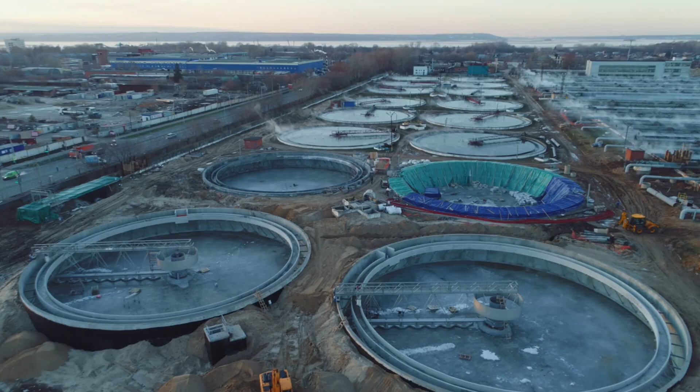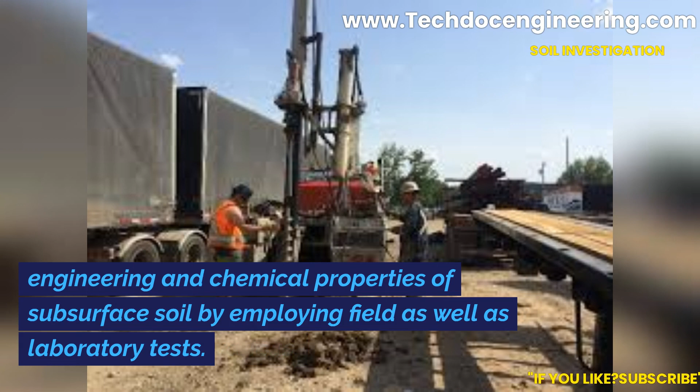This specification is prepared for the purpose of carrying out confirmatory/verification soil investigation work within the proposed plot at respective locations. Scope of the geotechnical investigation shall include ascertaining the existing conditions, subsoil strata, level of groundwater table, and determination of various engineering and chemical properties of subsurface soil by employing field as well as laboratory tests.

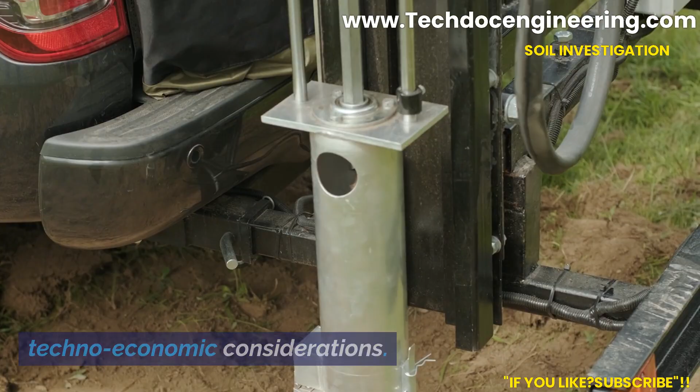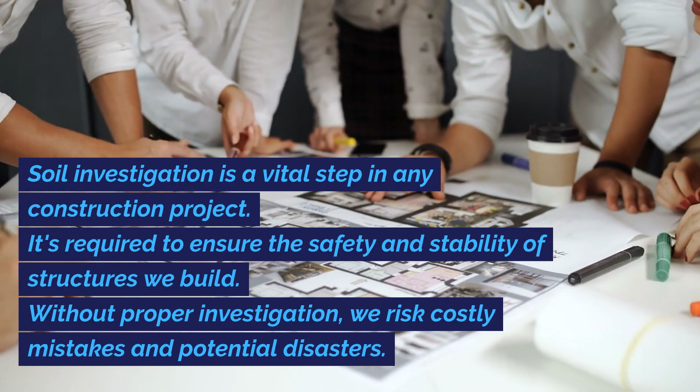It is required to propose a suitable foundation system for different types of structures based on techno-economic considerations. The need for soil investigation. Soil investigation is a vital step in any construction project. It's required to ensure the safety and stability of structures we build. Without proper investigation, we risk costly mistakes and potential disasters.

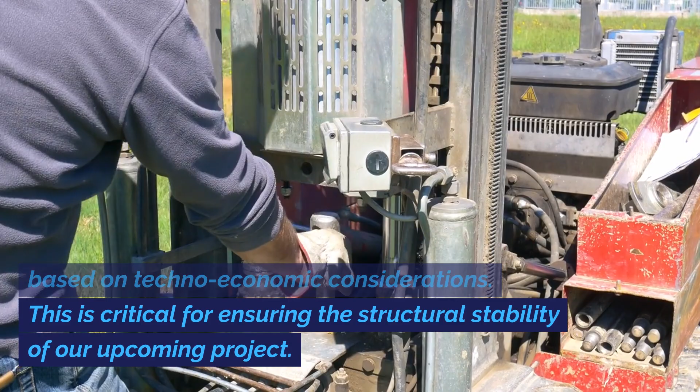Scope and purpose of geotechnical investigation. Geotechnical investigation is essential for our project located at your project location. The aim is to understand existing conditions, subsoil strata, groundwater levels, and soil properties. It helps us propose suitable foundation systems based on techno-economic considerations. This is critical for ensuring the structural stability of our upcoming project.

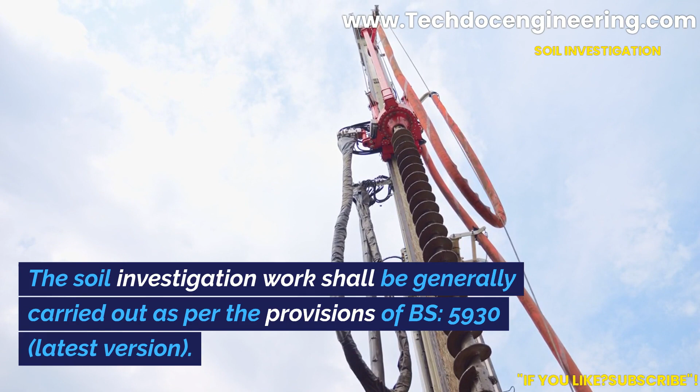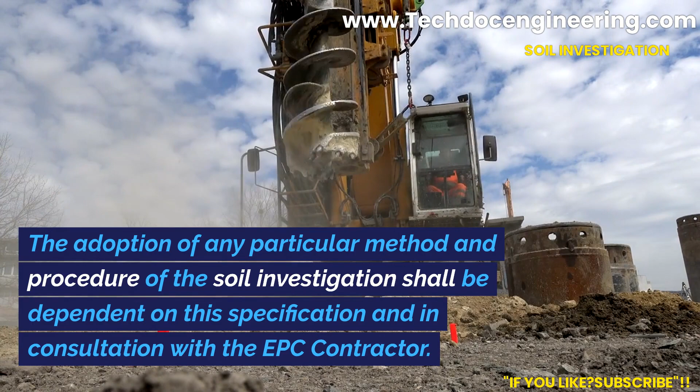The subsurface investigation shall be carried out generally in accordance with this specification. The soil investigation work shall be generally carried out as per the provisions of BS 5930, latest version. The adoption of any particular method and procedure of the soil investigation shall be dependent on this specification and in consultation with the EPC contractor. The extent of work shall be in accordance with Bill of Quantities.

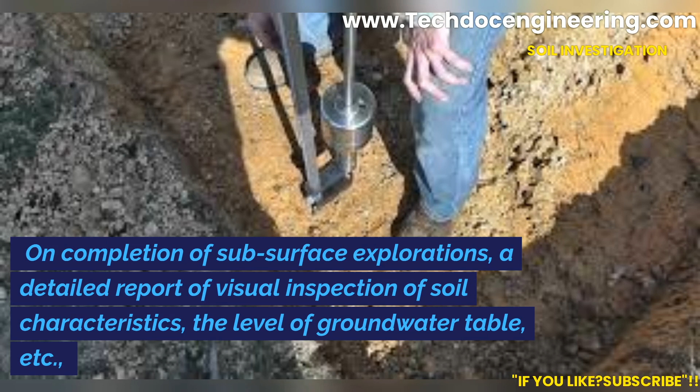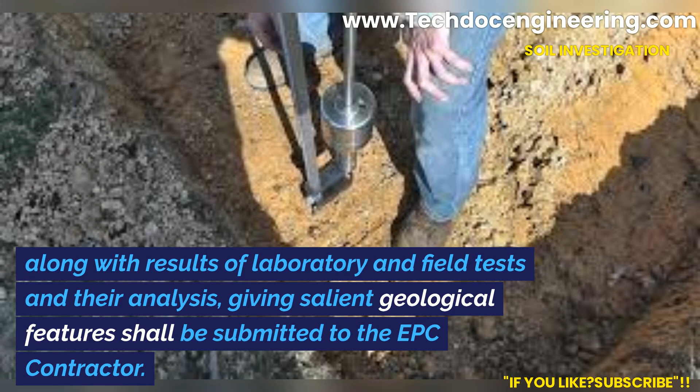The depth of exploration shall be governed by Section 4.0 of this specification and shall be to the satisfaction of the EPC contractor. On completion of subsurface explorations, a detailed report of visual inspection of soil characteristics, the level of groundwater table, etc., along with results of laboratory and field tests and their analysis, giving salient geological features, shall be submitted to the EPC contractor. These details shall be clearly indicated with respect to each reference borehole.

The contractor shall provide their foundation recommendations for open, pile foundation in the format as given at the end of this document. To provide information regarding the most suitable method for soil improvement wherever required.

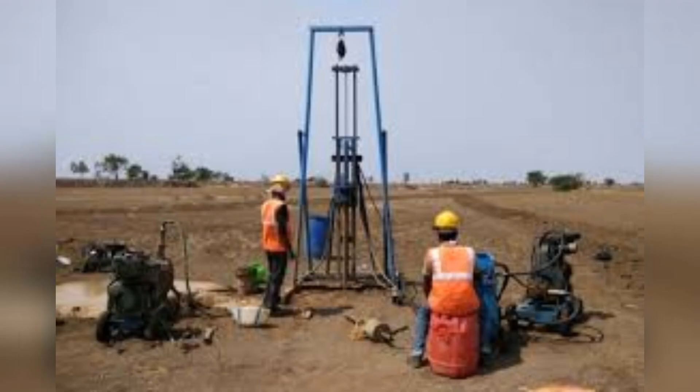Subsurface investigation. The subsurface soil investigation is to be carried out to arrive at the topographical features and gather information about strata in the subsoil and groundwater conditions. The subsurface investigation work shall be carried out generally in accordance with BS 5930, latest version.

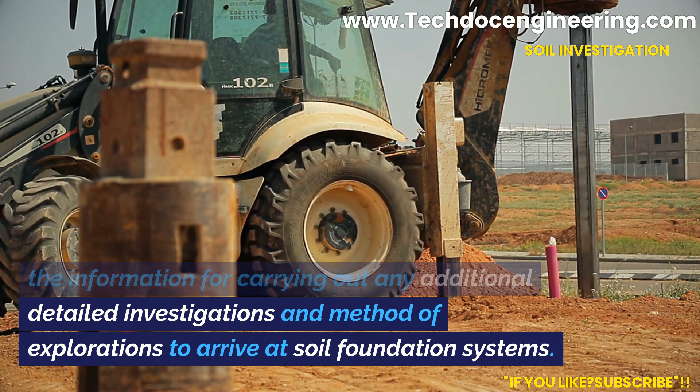Also, this investigation should help in arriving at different characteristics and nature of soil, the pre-consolidation it has undergone, and the information for carrying out any additional detailed investigations and method of explorations to arrive at soil foundation systems. Recommended locations of various field tests are indicated in your document.

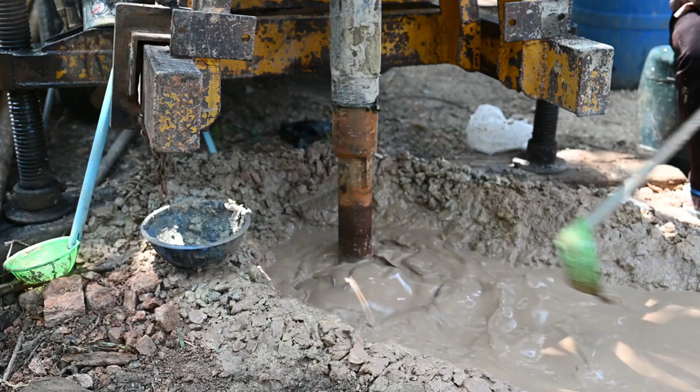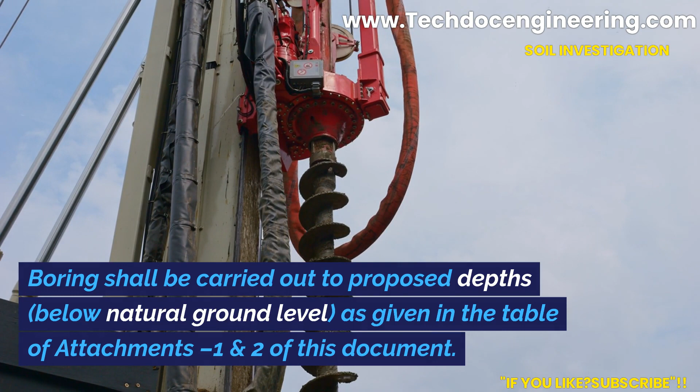Boring. The boring shall be carried out in all types of deposits, including boulders or gravelly strata and excluding hard rock, by the applicable method with the specifications given below. Boring shall be carried out to proposed depths, below natural ground level, as given in the table of attachments 1 and 2 of this document. In order to confirm the existence of hard rock, a minimum depth of 1,000 mm shall be drilled in the hard rock stratum, if met with.

When the rate of advancement of boring by chiseling is slow, i.e., less than 20 cm in 4 hours, the contractor shall advance core drilling with NX size double tube, triple tube core barrel of the approved design fitted with a diamond bit.

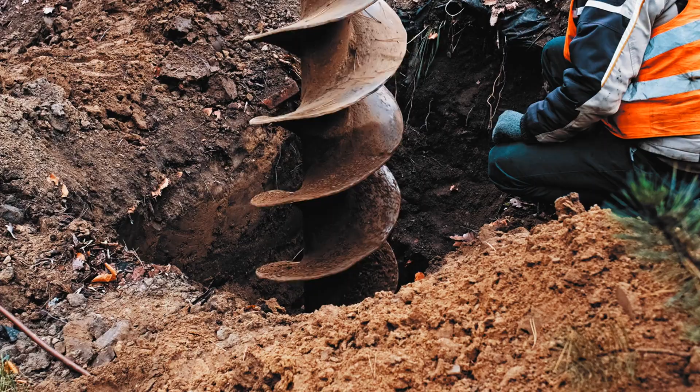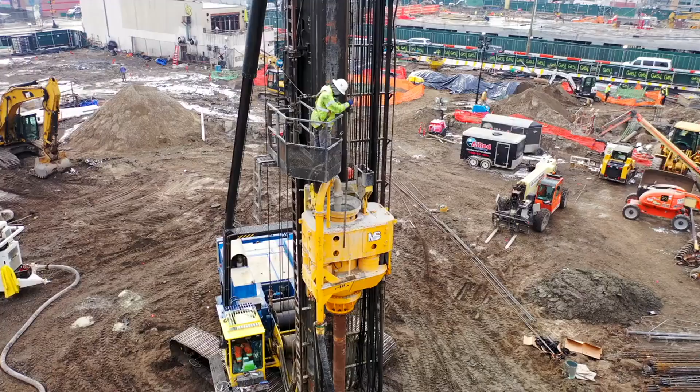Auger boring. Augers shall be of helical or post hole type and may be manually or power operated. The diameter of the hole shall be 150 mm. Uncased holes shall be permitted only up to a depth where the sides of the hole can stand unsupported. In case side fall is noticed, steps shall be taken immediately to stabilize the hole by using casing pipes.

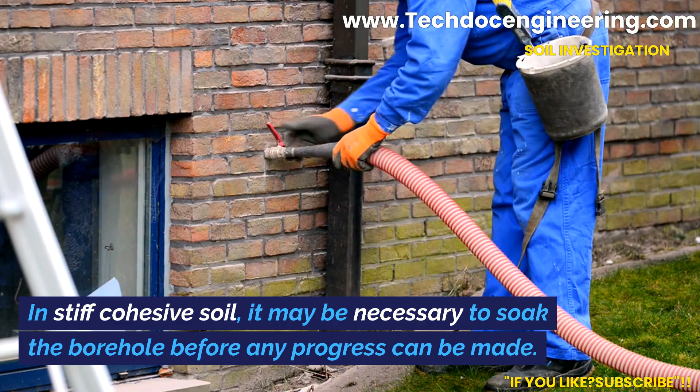No water shall be added while boring through soft cohesive soils and cohesionless soils above the water table. While boring through cohesionless soils below the groundwater table, water in the casing shall always be maintained at or above the groundwater table. In stiff cohesive soil, it may be necessary to soak the borehole before any progress can be made. While boring, care shall be taken to minimize disturbance to the deposits below the bottom of the borehole.

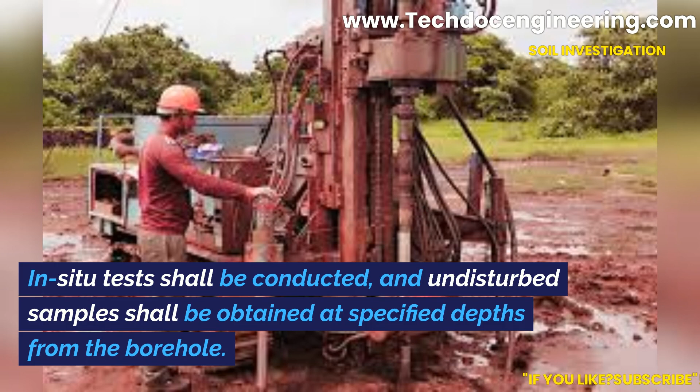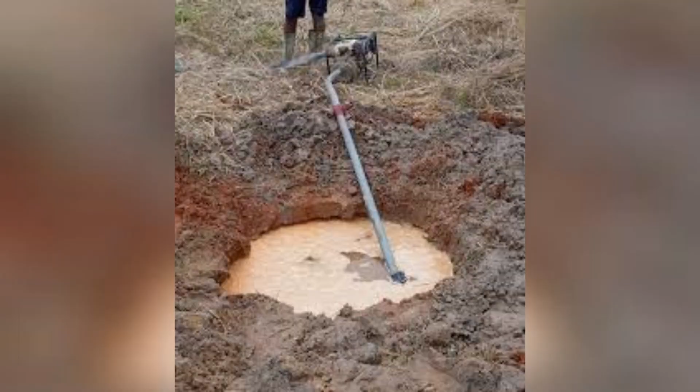In situ tests shall be conducted, and undisturbed samples shall be obtained at specified depths from the borehole. The borehole shall be kept clean and free from foreign matters while conducting these operations. Water table in the borehole shall be carefully recorded and reported. One of the following methods shall be adopted for measuring the water table. Method A is suitable for permeable soil, while methods B and C are suitable for both permeable and impermeable soils.

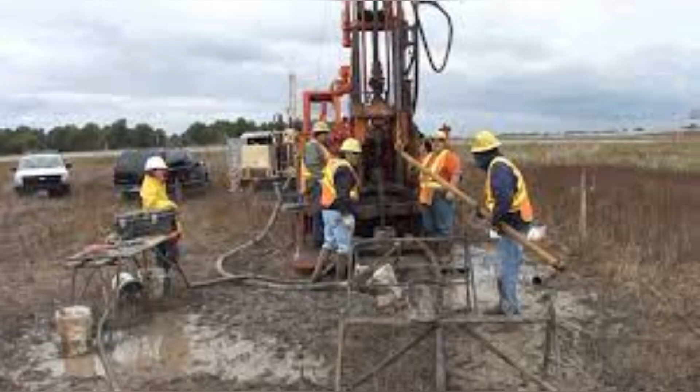A. The water table in the borehole shall be allowed to stabilize after depressing the water level adequately by bailing. Stability of the borehole sides and bottom shall be ensured at all times. B. The borehole shall be filled with water and then bailed out to various depths. Observations shall be made at each depth to see if the water level is rising or falling. The depth at which neither a fall nor a rise is observed shall be considered as the water table depth. This shall be established by 3 successive readings of water levels taken at intervals of 2 hours. The established reading shall be verified after 24 hours.

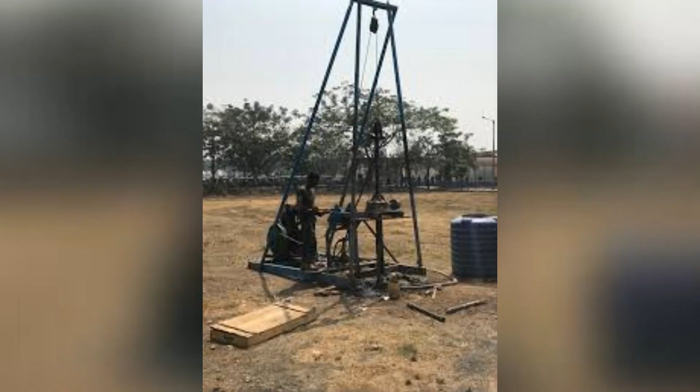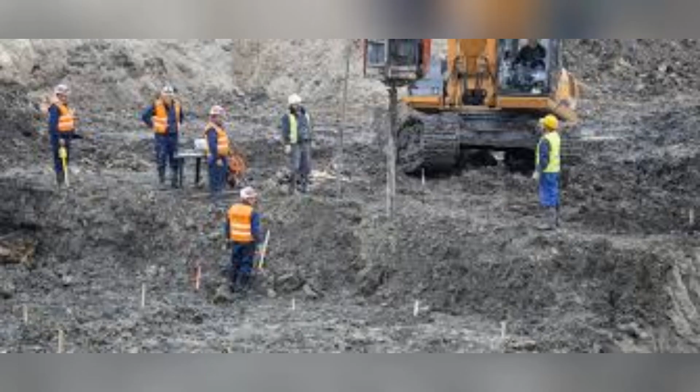Hvorslev method, Ref. Foundation Design by W.C. Teng. The water level shall be depressed by bailing, to say D below ground level, and shall then be allowed to rise. Water rise at suitable equal intervals of time shall be recorded. If H1 and H2 are 2 successive rises of water level in the borehole for the same time interval T, then H0, the distance of the depressed water level from the actual water table, shall be obtained as under.

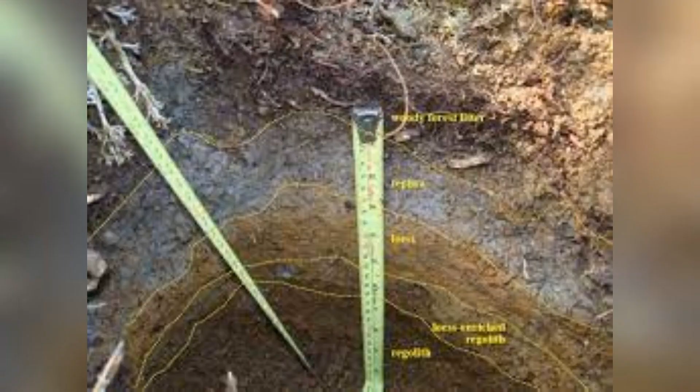H0 equals H1 squared over H1 minus H2. The water table depth HD from ground level shall be determined as under. HD equals D minus H0. 3 sets of observations shall be made, and the average value of HD determined immediately on completion of the borehole.

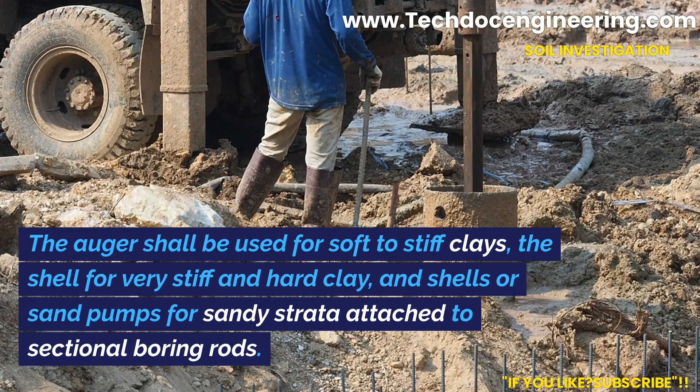Shell and auger boring. The requirements mentioned above in Clause 4.1.1 shall also apply to shell and auger borings. The auger shall be used for soft to stiff clays, the shell for very stiff and hard clay, and shells or sand pumps for sandy strata attached to sectional boring rods. The use of a chisel bit shall be permitted only in boulders and thin strata of rock.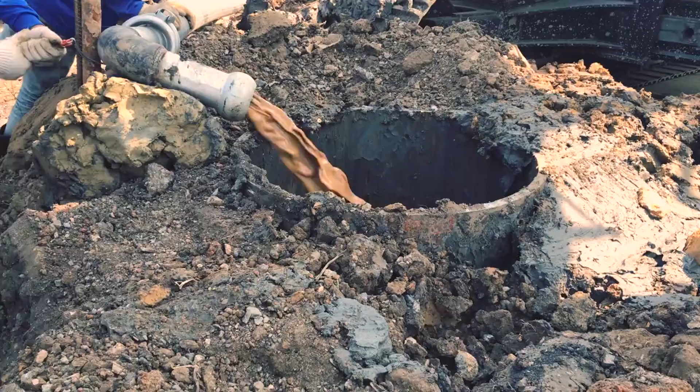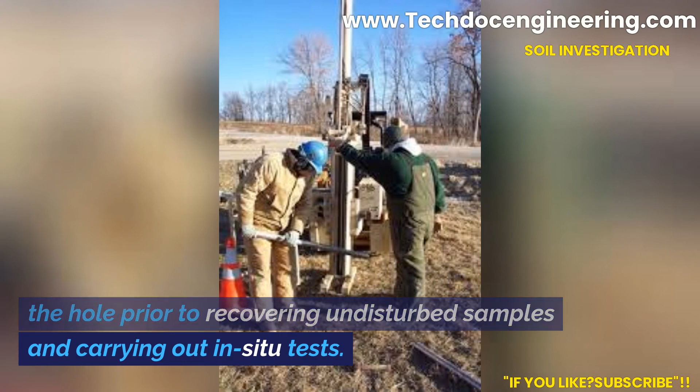Mud rotary drilling. Mud rotary drilling with bentonite slurry shall be carried out as per the standard method. Care shall be exercised in thoroughly cleaning the hole prior to recovering undisturbed samples and carrying out in situ tests. Percussion boring. Percussion boring shall be carried out as per the methods suggested in BS 5930. This method of boring shall be adopted for drilling boreholes in boulderous and gravelly strata.

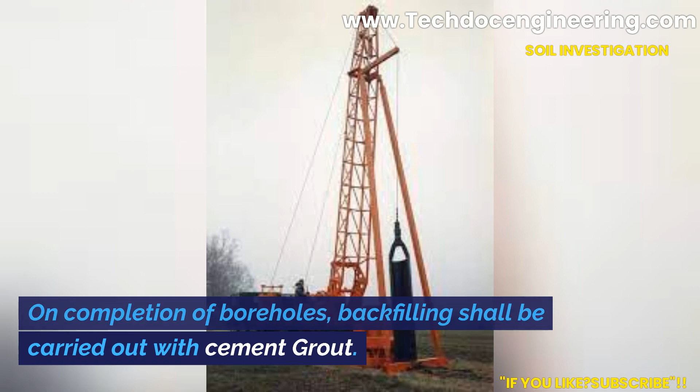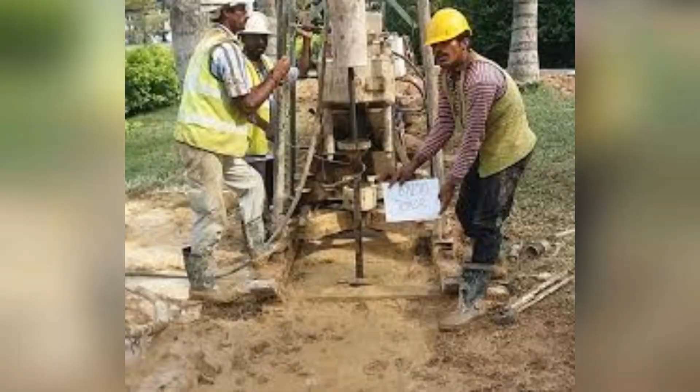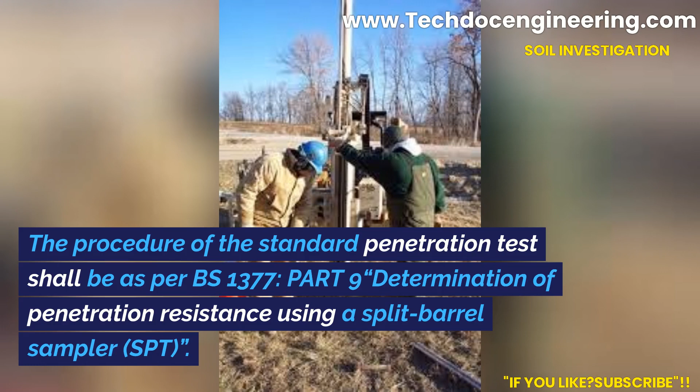Backfilling of boreholes. On completion of boreholes, backfilling shall be carried out with cement grout. In situ tests. The in situ tests shall be carried out generally in accordance with this specification and as per requirements given in BS 5930. Standard penetration test. The procedure of the standard penetration test shall be as per BS 1377, Part 9, determination of penetration resistance using a split barrel sampler, SPT.

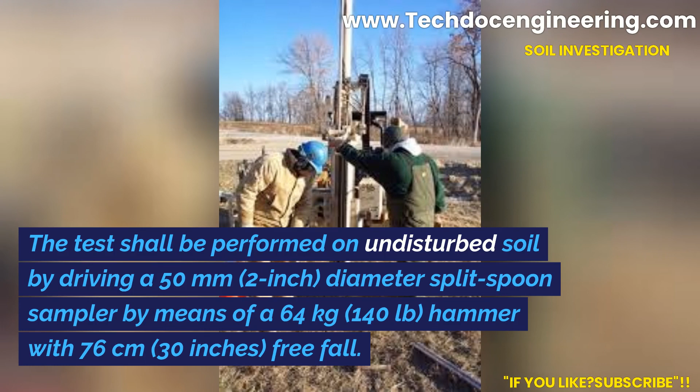These tests shall be conducted in all types of deposits and layers at intervals not exceeding 1.0 meters to a depth of 10 meters, and then at maximum intervals of 1.5 meters within a continuous stratum, or at every change of stratum, whichever is less. The test shall be performed on undisturbed soil by driving a 50 mm, 2-inch, diameter split spoon sampler by means of a 64 kilograms, 140 pounds, hammer with 76 centimeters, 30 inches, free fall.

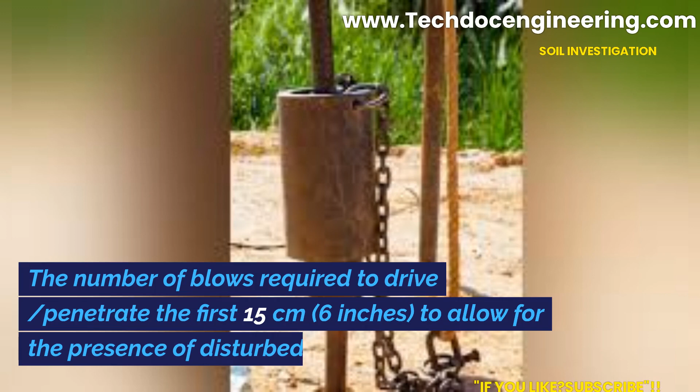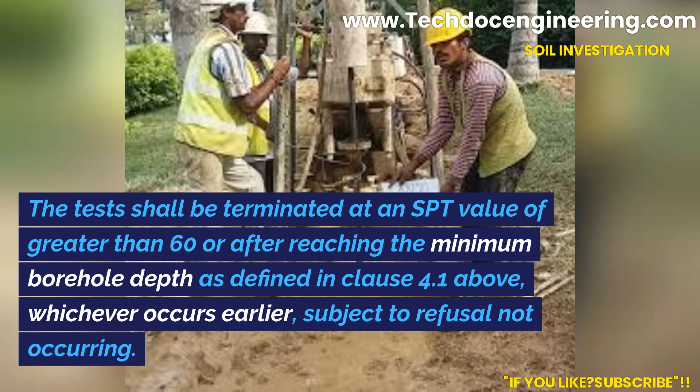The number of blows required to drive/penetrate the first 15 centimeters, 6 inches, to allow for the presence of disturbed material. The number of blows to drive the sampler a further 30 centimeters, 12 inches, of penetration is then recorded as N values. The samples obtained in the split spoon sampler shall be labeled and preserved for identification tests in the laboratory. The test shall be terminated at an SPT value of greater than 60 or after reaching the minimum borehole depth, as defined in Clause 4.1 above, whichever occurs earlier, subject to refusal not occurring. For hard strata, when SPT is greater than 40, SPT shall be carried out at 1.5 meters interval.

4.2.2 Cone penetration test with piezo cone. This test shall be carried out by pushing an electrical cone assembly with pushing equipment having adequate capacity to reach the desired depth.

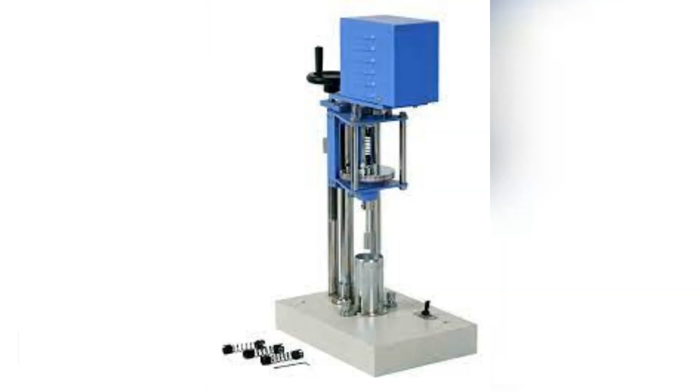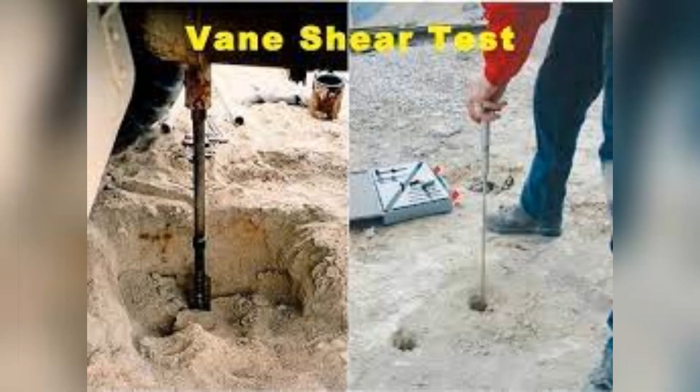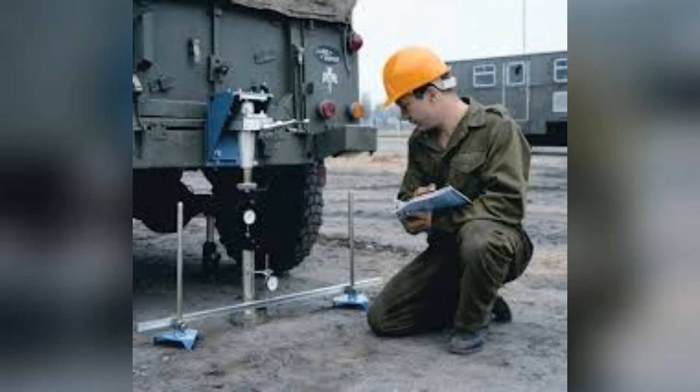4.2.3 Vane shear test. In situ vane shear test shall be carried out as per the relevant BS standard to determine the shear strength of cohesive soils, especially soft and sensitive clays, which are very susceptible to sampling disturbance. This test shall be conducted by advancing a 4-winged vane of suitable size, 75 mm to 100 mm diameter as per soil condition, into the soil up to the desired depth and measuring the torque required to rotate the vane. On completion of the test, the results shall be reported in a standard format.

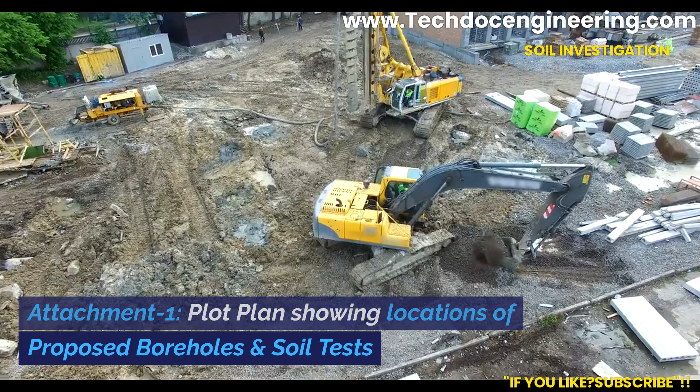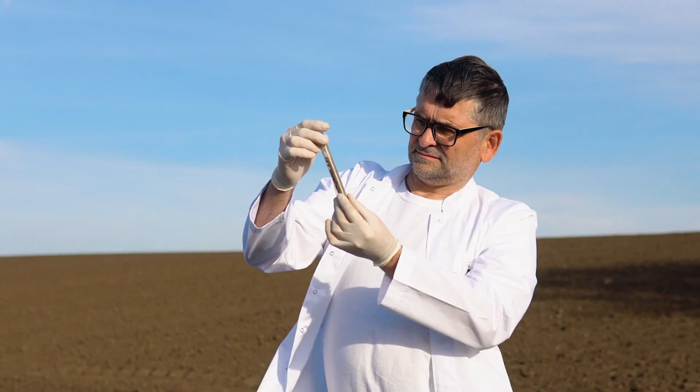Soil samples. The soil sampling shall be carried out generally in accordance with this specification and BS 5930, latest version. Various methods of soil sampling shall be adopted depending upon the nature of strata encountered. Borehole sampling. The samples shall be collected and preserved in accordance with BS 5930. Every sample shall be carefully labeled, and a sketch indicating the depth of the sample shall be maintained. In situ samples.

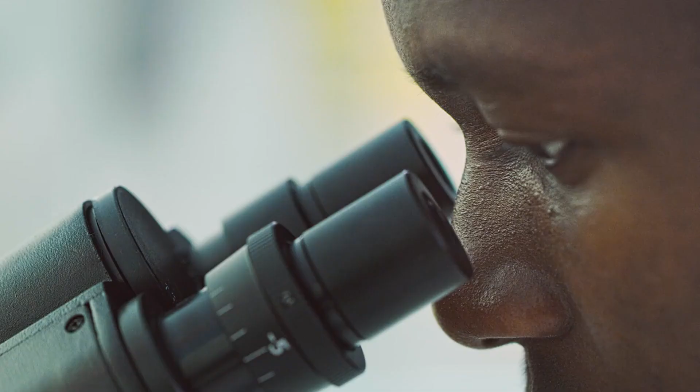Samples obtained from the in situ tests shall also be properly labeled. The samples shall be preserved in accordance with the relevant test standard and kept ready for transportation. Laboratory testing. Laboratory tests shall be conducted on the samples collected from the boreholes. The tests shall be conducted in accordance with IS 2720, latest version, and the relevant British standard as applicable. The standard of samples shall be generally as per BS 5930.

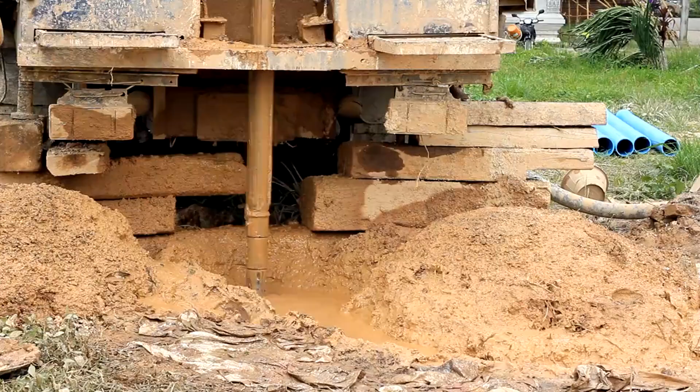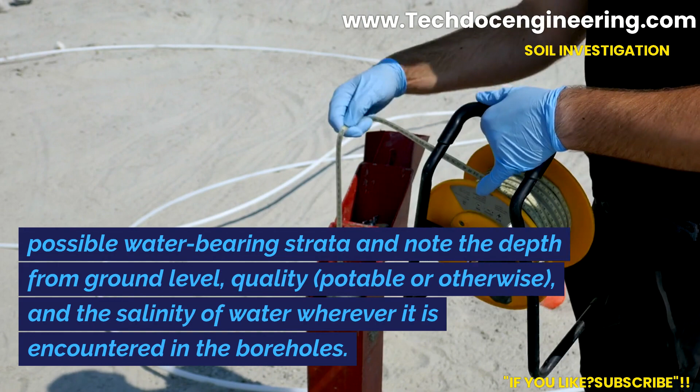Groundwater conditions. Groundwater conditions shall be established in all boreholes as far as possible. The contractor shall monitor the boreholes for possible water-bearing strata and note the depth from ground level, quality, potable or otherwise, and the salinity of water wherever it is encountered in the boreholes. If artesian conditions are encountered, the same shall be controlled by installing suitable strainers and casings.

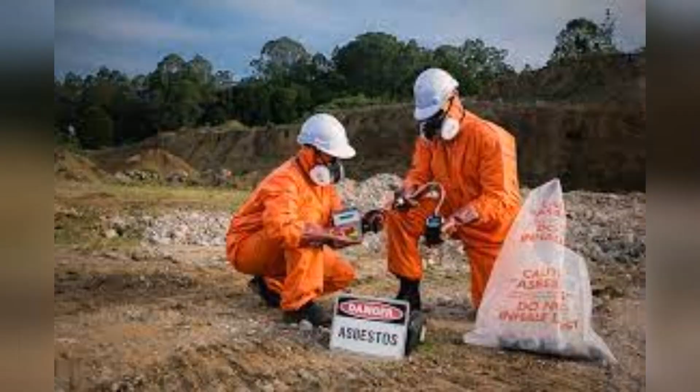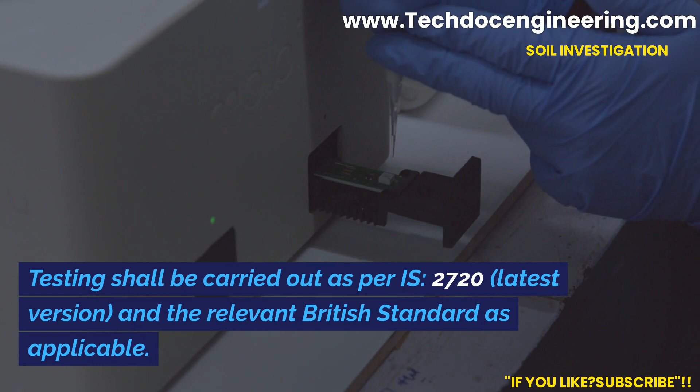Testing for contaminated soil. Samples from the boreholes shall be tested for the presence of any contaminants. In the event of contamination being detected, steps shall be taken to locate the boundary and source of the contamination. Any such contaminated soil encountered shall be removed and disposed of in accordance with applicable laws and regulations. Testing for engineering properties of soil. Testing shall be carried out as per IS 2720, latest version, and the relevant British standard as applicable.

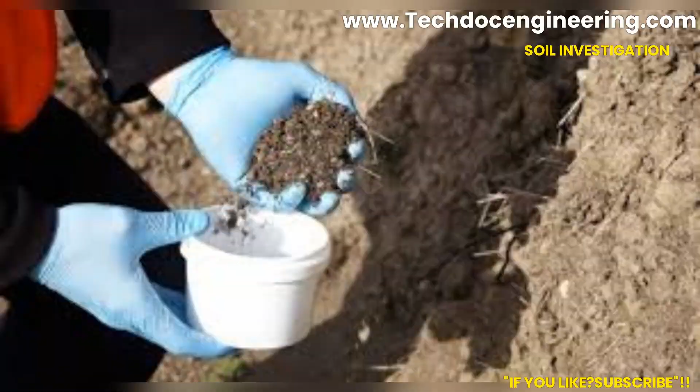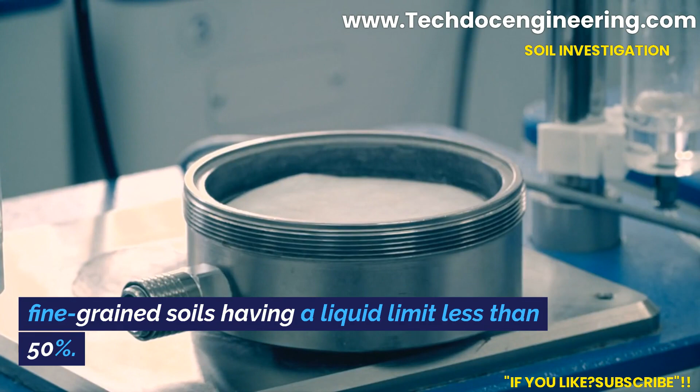Grain size distribution. The particle size distribution of soil samples shall be determined by sieve analysis and hydrometer analysis. The hydrometer analysis shall be done on fine-grained soils having a liquid limit less than 50%. From the sieve analysis and hydrometer analysis, the percentage of various sizes of particles in the soil shall be determined. Atterberg limits. Liquid limit and plastic limit shall be determined as per IS 2720, latest version. Specific gravity of soil particles. The specific gravity of soil particles shall be determined as per IS 2720 Part 3/Sec 1, latest version.

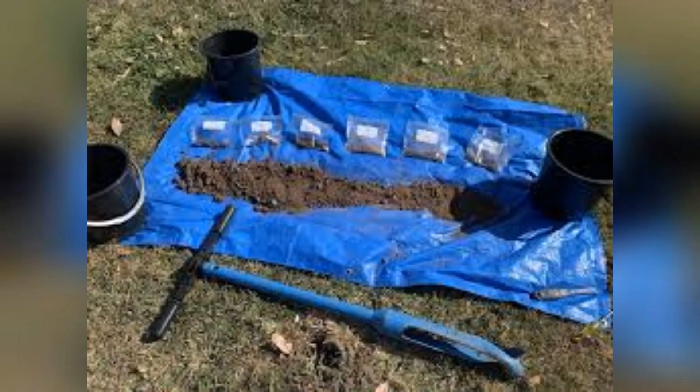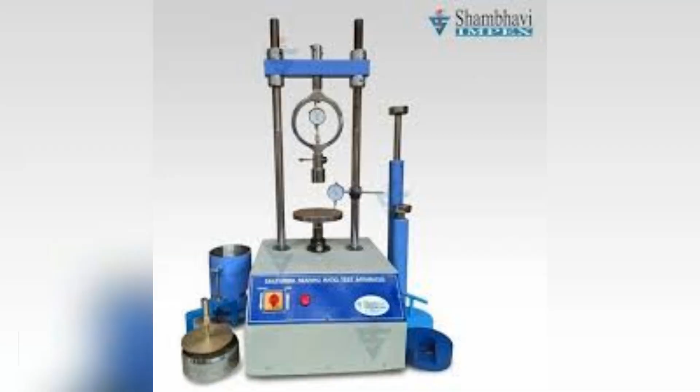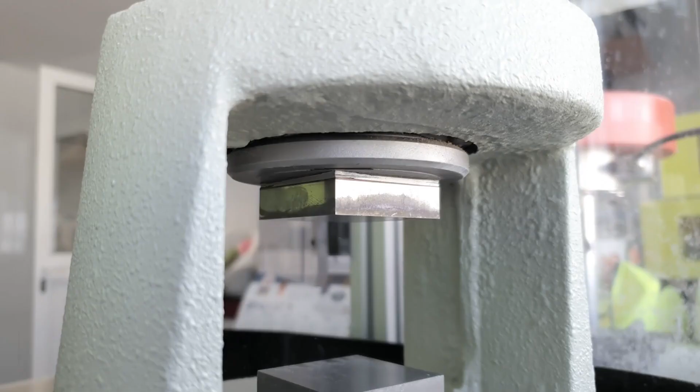Water content and density. The water content and density relationship shall be determined by compaction tests, either by standard Proctor or modified Proctor tests as per IS 2720 Part 7, latest version. California Bearing Ratio, CBR. CBR tests shall be conducted on representative soil samples at desired intervals as per IS 2720 Part 16, latest version. Unconfined compressive strength. Unconfined compressive strength tests shall be conducted on representative soil samples where applicable as per IS 2720, Part 10, latest version.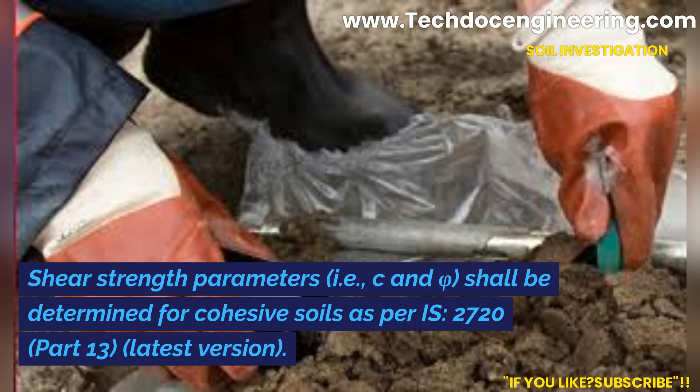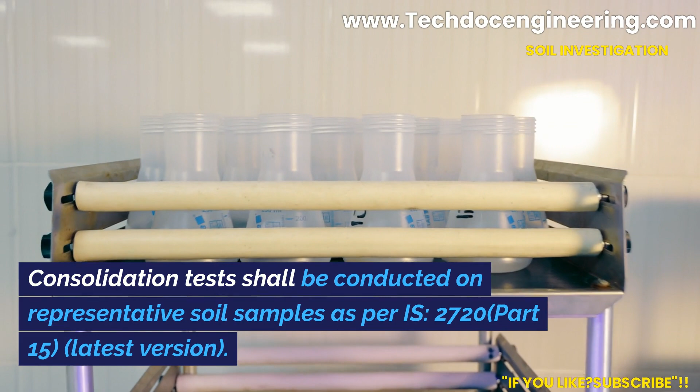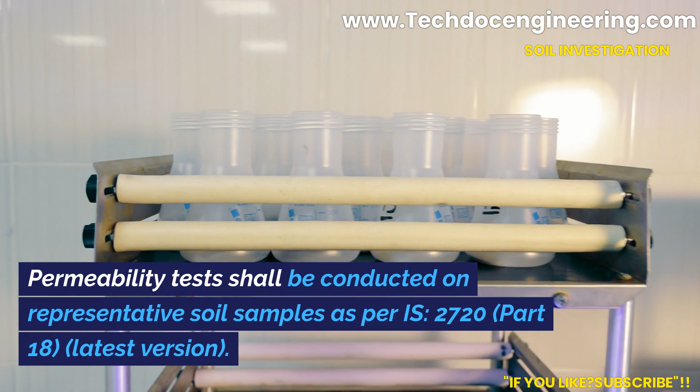Shear strength parameters. Shear strength parameters, i.e., C and Phi, shall be determined for cohesive soils as per IS 2720, Part 13, latest version. Consolidation test. Consolidation tests shall be conducted on representative soil samples as per IS 2720 Part 15, latest version. Permeability test. Permeability tests shall be conducted on representative soil samples as per IS 2720 Part 18, latest version. Preparation of borehole logs. General. Logs of all boreholes shall be prepared as per the format enclosed at the end of this document.

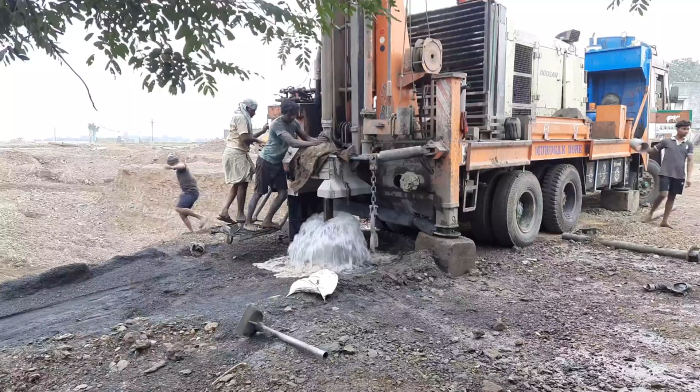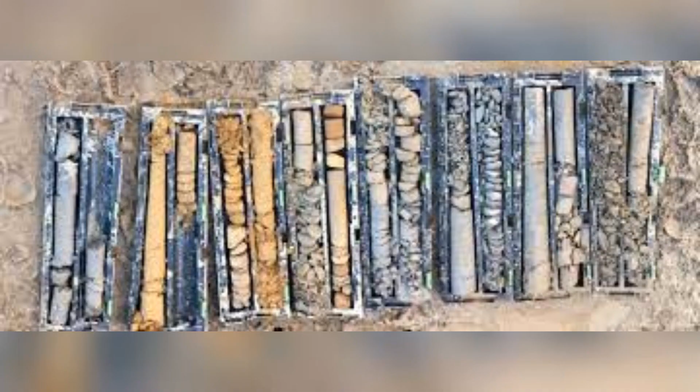Borehole logs. A boring log shall be maintained for every borehole. The boring log shall include the following details. A. Borehole number. B. Location of borehole with respect to the plot plan. C. Depth of borehole. D. Date of drilling. E. Type of boring. F. Details of strata encountered. G. Nature of soil and description. H. Water table details. I. Rock samples, if encountered. J. Boring advancement rate. K. Results of in situ tests. L. Results of laboratory tests. M. Observations and remarks of the contractor.

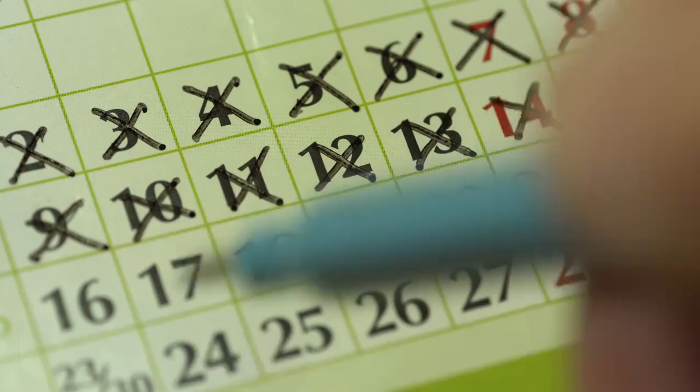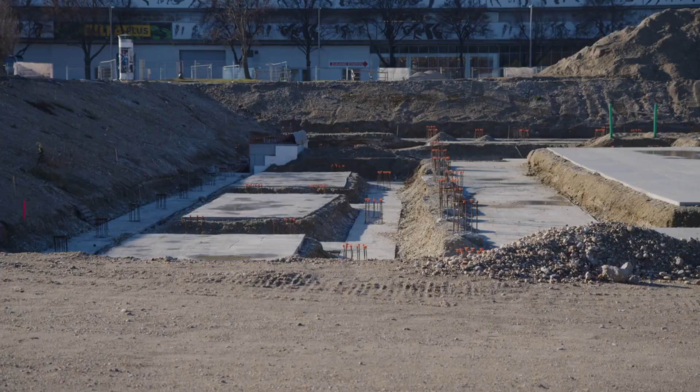Soil test logs. Soil test logs shall be prepared for each soil sample tested. The log shall include the following details. A. Sample number. B. Depth from which the sample was collected. C. Date of sampling. D. Details of the test conducted. E. Results of the test. F. Remarks of the contractor. Foundation recommendations. General. The contractor shall submit recommendations for suitable foundation systems for the structures based on the geotechnical investigation results and considering techno-economic factors. Specific recommendations.

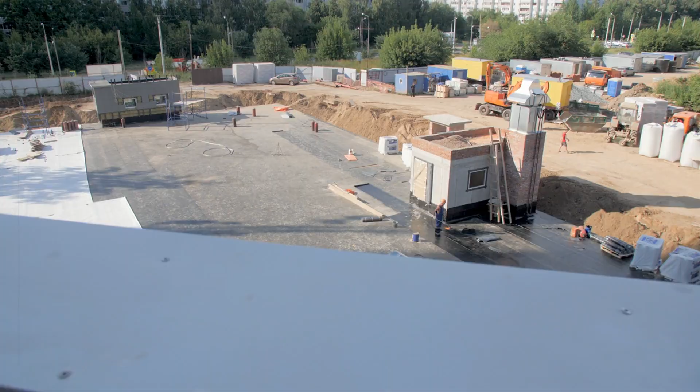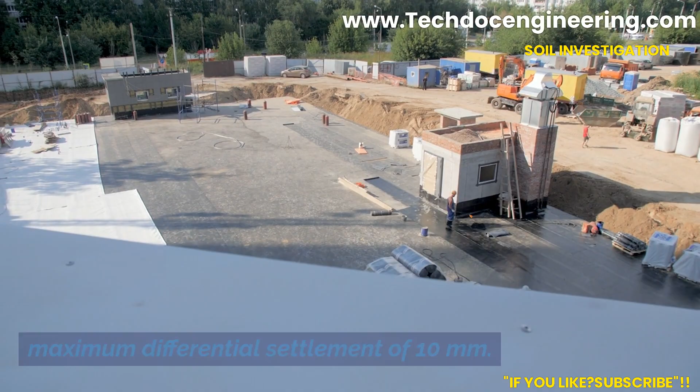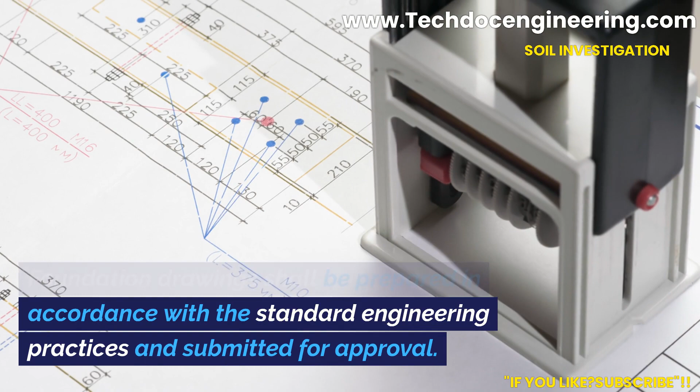A. For isolated foundation for buildings, equipment supporting structures, pumps, columns, pipe rack, pump foundations, and minor foundations if any, the maximum permissible settlement shall be 25 mm with a maximum differential settlement of 10 mm. For pad foundation for tanks, the maximum permissible settlement shall be 40 mm with a maximum differential settlement of 20 mm. The maximum settlement at the center shall be 300 mm, and at the edge, it shall be 150 mm. For raft foundation for buildings, the maximum permissible settlement shall be 40 mm with a maximum differential settlement of 20 mm. The maximum settlement at the center shall be 300 mm, and at the edge, it shall be 150 mm. Foundation drawings shall be prepared in accordance with the standard engineering practices and submitted for approval.

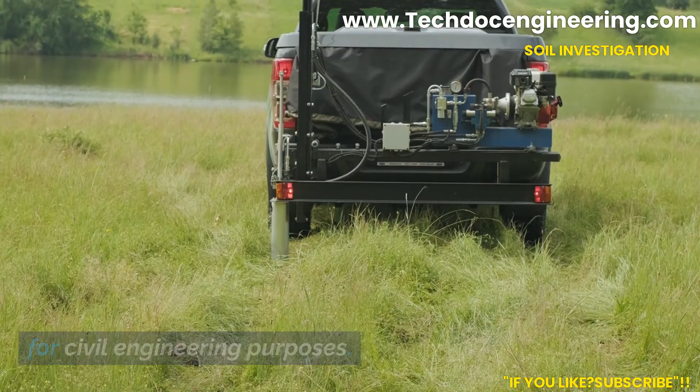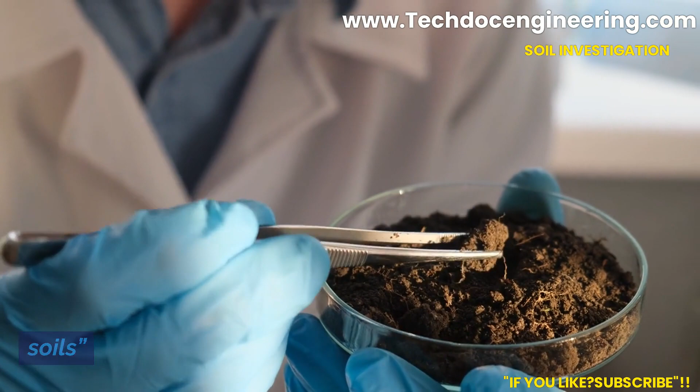BS 1377, Part 9, 1990, Methods of Test for Soils for Civil Engineering Purposes. Determination of penetration resistance using a split barrel sampler, SPT. IS 2720, latest version, methods of test for soils. Foundation design by W.C. Teng, reference for Hvorslev method. Other relevant British standards and codes of practice.